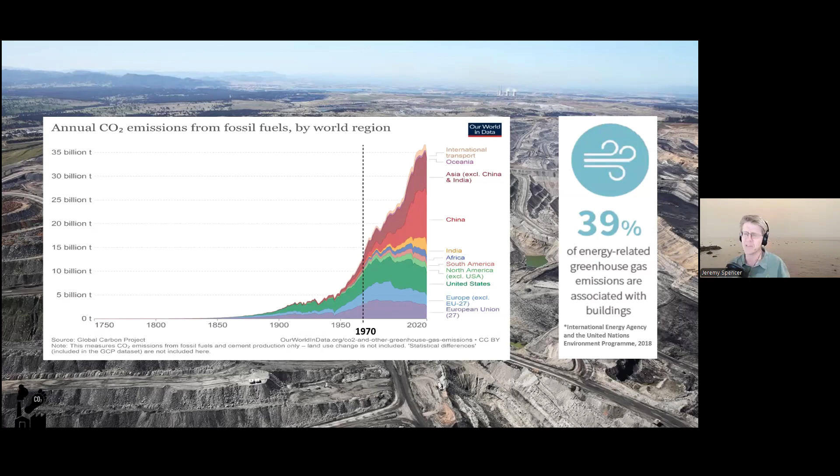The second thing it brings up for me is if you are in the building industry, you are in a job that disproportionately has an effect on trying to solve this problem. So you're in somewhat of a privileged position, and your choices matter, the way you run your business matters, and the product that you supply matters.

Let's bring it back to homes because that's what the Sustainable Builders Alliance is focused on. That's probably where our special knowledge lies. And let's look at the impact of our homes on this carbon number. So there are two main carbon impacts of our homes. One is operational energy use, and the other one is the embodied carbon in our homes from the embodied energy. That's the energy that it took to create the materials that our houses were made from, and the carbon dioxide that got released in using that energy.

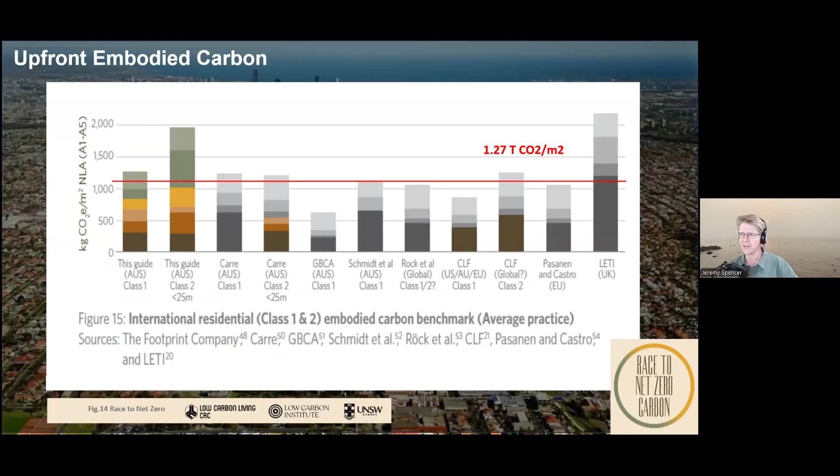On top of that, the demand in Australia is for 200,000 new residences per year. We're a bit below that at the moment, but that's what we're trying to build to keep up with demand. That means every 5 or 6 years or so, we're adding another million homes onto the grid. And we simply can't allow the next million homes that we put on to have the same impact as the last million homes, not just from the carbon point of view, but also if we are actually trying to green Australia, we're trying to put everything onto a grid and green that grid. For that not to cost the earth, we need to limit the demand of the new homes that we're putting into the system.

Which is why we, the founding members of Sustainable Builders Alliance, got together to create what we're doing and to try and give you that information. And it is simply this: we want to be able to give you the confidence to build net zero sustainable homes. What does that mean? That means we want you to be able to put a shingle up on your door to say, we sell net zero homes. And when someone comes to you and says, yep, I want one of those, you can say no problems and have the confidence to bring it into the market.

Towards that end, on this website, probably the heart of this website is something called the Roadmap to Net Zero Homes. And it's got 5 different steps, and all the information that we put on the website hangs on that scaffold of these 5 steps. And it's simply this, very simple steps. Step 1, good design. Design a home that's designed for its climate using passive solar design, so it needs minimal extra heating and cooling because the climate is doing the heavy lifting. Step 2, choose materials that are low themselves in embodied carbon, vis-a-vis other materials on the market, to try and have a lower impact home when you hand over those keys.

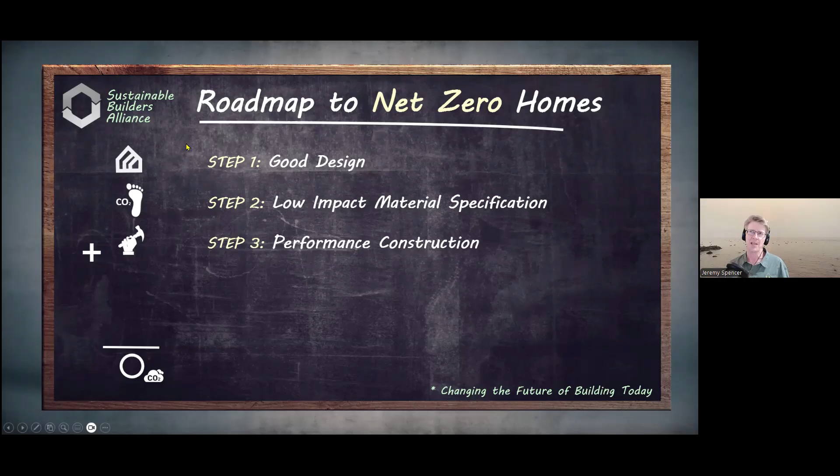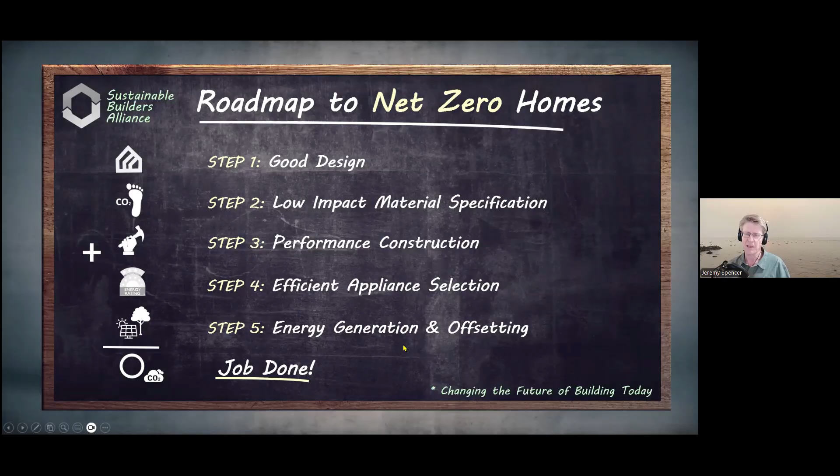Step 3, performance construction. Build the house so that it actually performs to its energy rating in that good design section, and it performs on the ground as it did on the paper in the design office. Step 4, then keep the demand low in the house by making sure that other major things, the appliances that you put in the home, are also energy efficient. And then the last step is to put on photovoltaics for either net zero, producing as much power over the year as you use, or potentially true zero, also accounting for the embodied carbon in the home and trying to offset for that. And job done if you can do all that. We'll talk a little bit more about offsetting maybe just at the end, because it's not quite as straightforward as I made it sound just there.

Okay, that's what Sustainable Builders Alliance is trying to do, but let's look at what's possible, and I'll show you a couple of homes that we've done, and also then the case study home that I want to show you today, and then we'll get into how it's all put together. This is sort of the Positive Footprints, I guess, story, my little backstory. This was back in 2012, not our first home, but I think our third home perhaps, maybe it's a few more than that, but it's the first one where our client came to us and said, our house is producing more power than it used. And he sent me this bill way back then. He's getting this bill every year or so. He's on a very good feed-in tariff, of course, which is coming to an end.

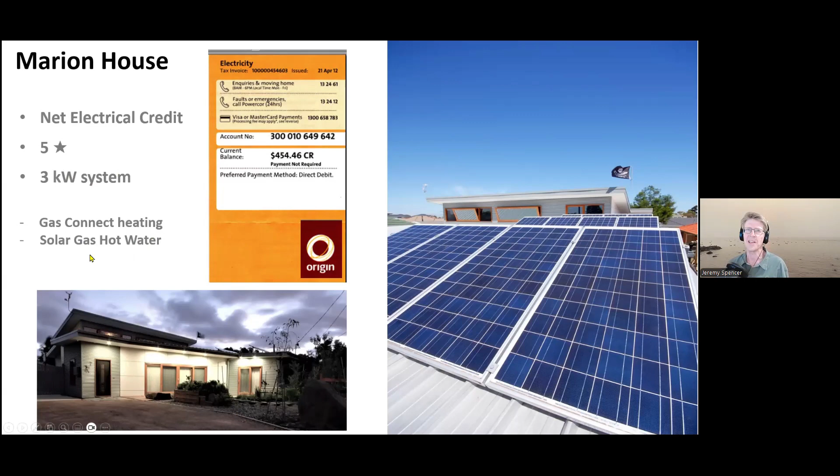But this gave me the idea that as long as you minimize the energy use in a home, it doesn't actually need all that much to run. This only had a 3 kilowatt system. It did have gas heating. We had gas hydronics, because this is back in the day when gas was green, and we had gas boosted solar. But this was the start of that inkling of an idea.

Then when the industry moved from 5 stars to 6 stars, there was a bit of an uproar at that stage about how difficult 6 stars would be. So we decided then to create the 9 star series. And this is one of those. This particular house we built for my parents, so I got a bit of the lived-in data.

This one had a 3.5 kilowatt system. It had reverse cycle air conditioning, but it still had gas boosted solar hot water and a gas oven. But I would say that this one was, well, let's say net zero, approximately. Though it's hard to work out because it did have some gas on there as well.

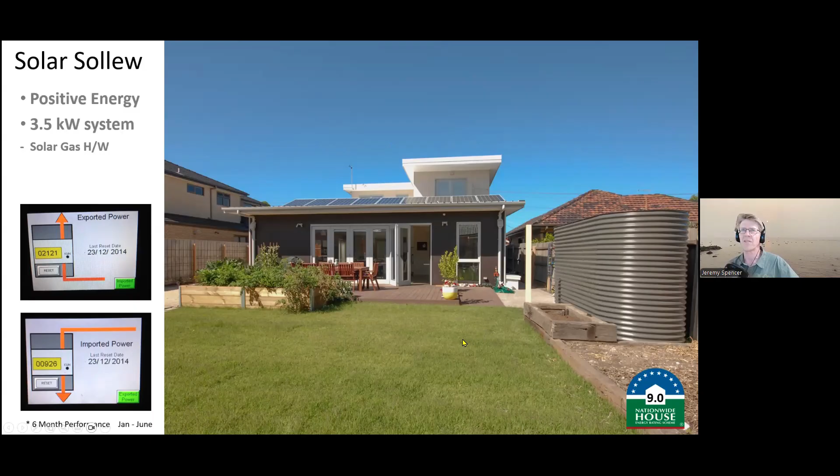Our first all-electric home, where you just got one fuel bill, so it's easier to work out what's going on. This one finished in 2017, and I believe Greg Lamb is on this call. Greg was our lead carpenter at the time on this job, so he pulled off a great one here. This house has been running for 2 years past 2017. After 2 years, the owners sent me the bills.

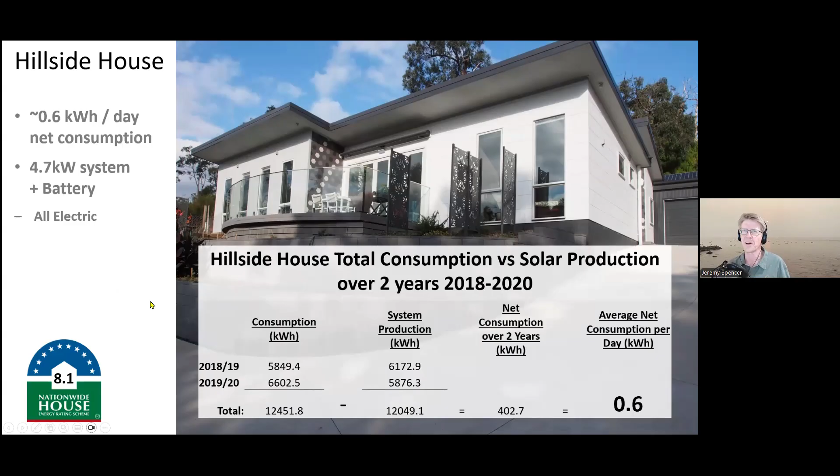They've got 3 adults who live in this home, and they work there during the day as well as sleep at night. And they were managing over a 24-month period to have a net average daily usage of 0.6 kilowatt hours. So just above net zero, but only a smidgen. When you consider the average, as I showed you before, is somewhere around 32 kilowatt hours when you have an all-electric home, this is very close to net zero. That was with a 4.7 kilowatt system and a battery. Of course, systems were a bit smaller than they are these days.

It can also be done for renovation, not just new homes. Whenever we do a major renovation these days, we aim for net zero as well. In the areas where we work, north of Melbourne, there tend to be a lot of older weatherboard homes where the weatherboards are getting to the end of their lifespan. As long as we get the opportunity to take off the cladding, re-insulate, maybe extend, we can usually get those homes to a net zero footing.

So the Carbon Zero series was Positive Footprint's response to all the hoo-ha that came up when the industry was considering going to 7-star and whole of home, and how difficult that was going to be, with the aim of becoming net zero ready. And we really wanted to show that you could go well beyond that already.

So the Carbon Zero series were homes that not only minimize their operational energy and then put on enough photovoltaics to provide the power that the house needs to run annually, but also calculate the embodied carbon in the home, minimize that, and then put on extra panels to provide more renewable power to the grid, so that over time that offsets fossil fuels needing to be burnt to provide that power and pays back the embodied carbon debt of the home. Now,

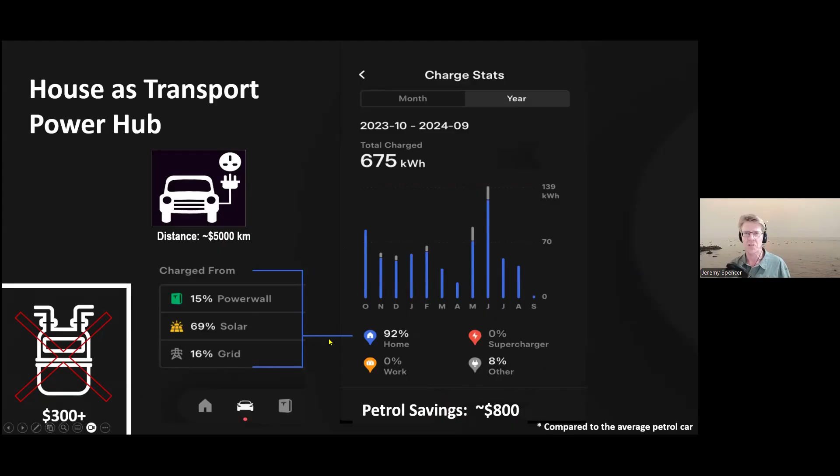So this house has a 13 kilowatt system on the roof, and it has a 13 kilowatt Powerwall battery, which is one of the reasons why it's able to have that very minimal demand. The other reason, of course, is because it's low demand to begin with. But that was a saving of $800 on equivalent petrol fees to drive that car. On top of that, because it's an all-electric home, we don't have a gas meter. There's another $300. If you start adding these numbers up, you get to a saving in excess of $3,000 year on year running this particular home.

Why is this important? Well, it's super important. I've started to think of sustainability as more than just the house itself and what we're offering the owners, but how it fits into the bigger picture. And the bigger picture, as I mentioned when we were looking at all those houses in Melbourne, is that we're trying to put all of industry onto the grid. We're trying to put business onto the grid. We're trying to put transport. We're trying to put all of our buildings and our homes onto the grid, with the idea that as the grid greens, most things on the grid green in tandem, as a way of reducing the environmental and carbon footprint of Australia more broadly, and getting to that net zero level. So that's the logic behind it. But if we don't want it to cost an arm and a leg, it's very important that our homes, if we want to be sustainable, minimize that extra demand as much as possible.

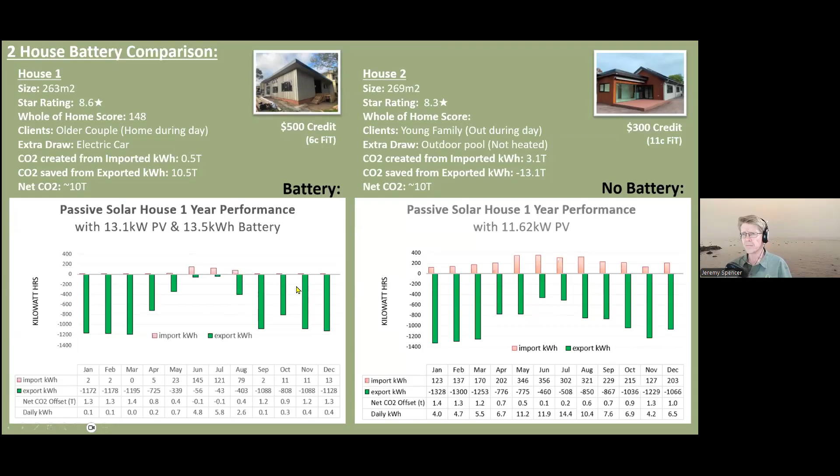But really, when you look from a society point of view, you have so much less demand on the grid if you can use most of your power at home. So this house is a very low demand on the grid, but it's also a very resilient home. Resilience is this buzzword that's been passing around for the last couple of years in the sustainability movement.

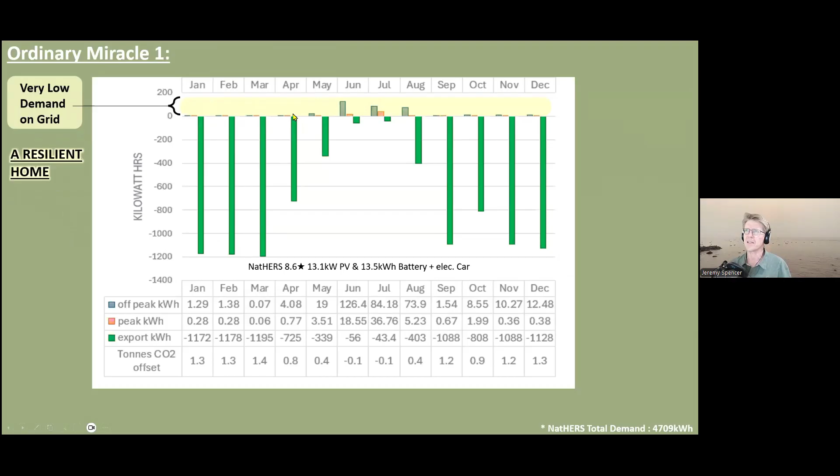What happens in the future when we have more floods, more fires, more problems, and there's potentially blackouts? We're after resilience. And if you look at this house, effectively, this house could just go offline and just run on its battery for months on end. That's a huge amount of resilience from a net zero home.

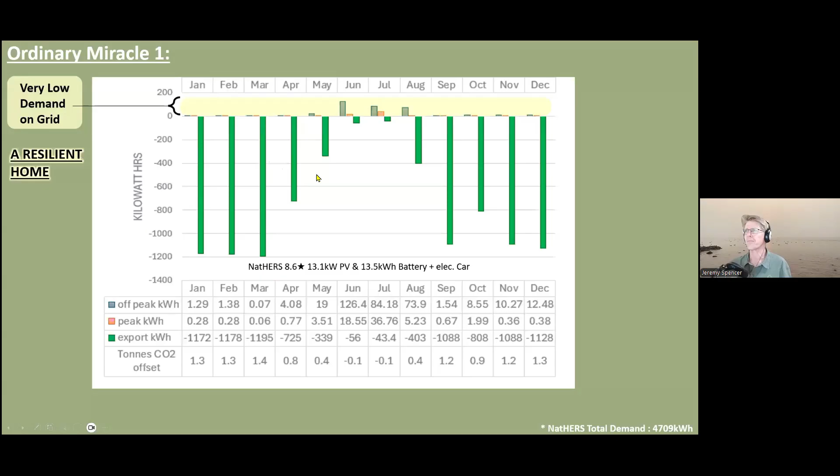The other thing to note about this graph is the amount of power that it produces. So there's enough power here. Again, when we're talking about some sort of emergency, there's enough power for people to come and charge their cars here if they needed to, or it could run, as it says there, enough power for 2 equivalent homes. So I'm starting to think of net zero homes as energy hubs.

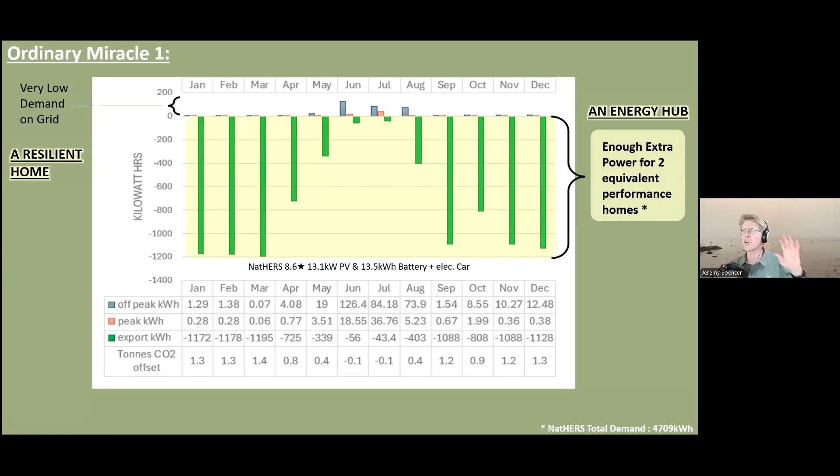Now, there is a little bit of pushback at the moment. Those builders out there who've installed solar panels recently may have found that it's a little bit more expensive at the moment because you need to have one of the new inverters that has a curtailment function. What the industry is worried about now is too much solar potentially being put into the system during the day, so that if there's too much solar, they've got a capacity just to turn that off to maintain the right voltage within the system.

So 2 things I'll say to that. One, producing the power is not something, in my opinion, that we should be stopping. What we should be doing is trying to harness the idea of batteries, and in the very near future, electric cars, which are simply batteries on wheels. In fact, a standard electric car has a battery about 2 to 3 times the size of the Tesla Powerwall that went in here. And of course, typically they're not doing anything at night.

What we were waiting for is something called V2G integration, vehicle to grid integration. But I'm glad to announce that went in a month or so ago into Australian Standard 4777.2, not one that we really need in the building industry, but one that the industry needs to start creating cars that not only can take power from the grid, but can also supply back to the grid and potentially supply back to homes as well.

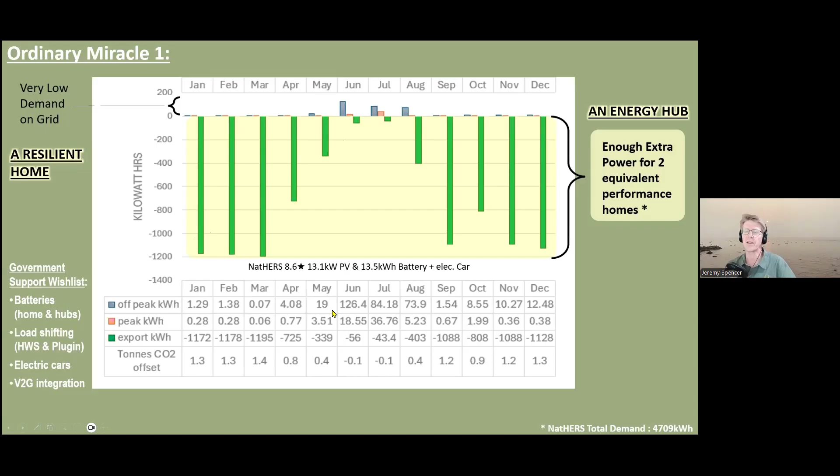If you're not already doing it, find a hot water service, an electric heat pump hot water hopefully, that has a timer on it at the very least, so it can be set to charge during the day. Make use of all this renewable power that gets put into the grid as a way of time shifting that power usage. All right, what else did I learn?

Well, this house exports to the grid 9,224 kilowatt hours, times 6 cents feed-in tariff. That's how you get the 553 in credit instead of the average electric bill for Victoria, 2,228. And when you work it out, it exports 20 times more power than it imports. And just looking at this sort of blew me away.

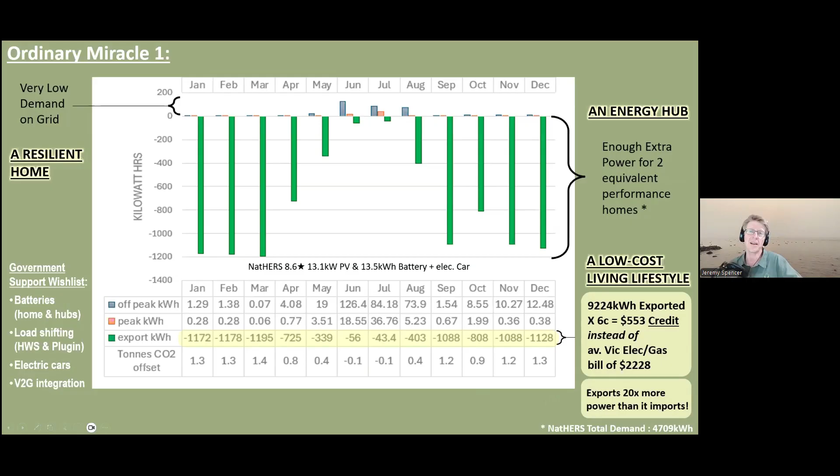So I also see net zero homes as now low cost living lifestyles. Not only does it save that much, but you can plug things into it like cars and you can save even more. And of course, no gas meter. And lastly, the house is offsetting 10 tons of carbon dioxide instead of creating that 5 tons of carbon dioxide. So it's a carbon negative footprint.

So when someone asks me now, what is a net zero home? This is what I'm answering. It's a resilient home. It's an energy hub. It's a low cost living lifestyle, and it's a carbon negative footprint. Okay, that's the operational performance of this particular home, and where we could potentially move to with just a little bit of incentive.

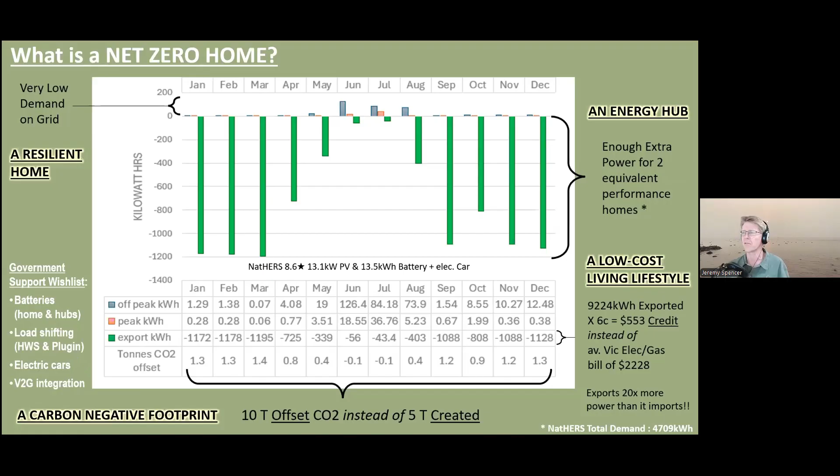By the way, if the government wants to put some incentive around getting more electric cars out there, once we get this V2G happening, just make charging during the day free. Imagine what an incentive that would be. People would be charging their cars during the day, come home at night time, and part of the deal is part of the battery could be used by the network providers to export to the grid or help balance the grid. Just a couple of ideas I had looking at this particular graph.

All right, let's look at embodied carbon, just to finish the performance of this home. So I ran this house through the True Zero Carbon spreadsheet, which is the spreadsheet I developed in conjunction with Melbourne University, who created the EPIC database. It works off the EPIC database. We developed this for the True Zero Carbon Challenge. This home has an upfront carbon component of 173.6 tonnes of carbon dioxide.

So still a lot, and hopefully I'll get some time to go through that, seeing how my voice holds up. But a fair bit less than the average home, 250 to 300 tonnes, somewhere in there. But if you look at that over here, just on a simple payback, 173.6 tonnes of embodied carbon, at the moment it's offsetting 10 tonnes of carbon dioxide per year, 17.4 years, if it was a simple payback and everything remained the same.

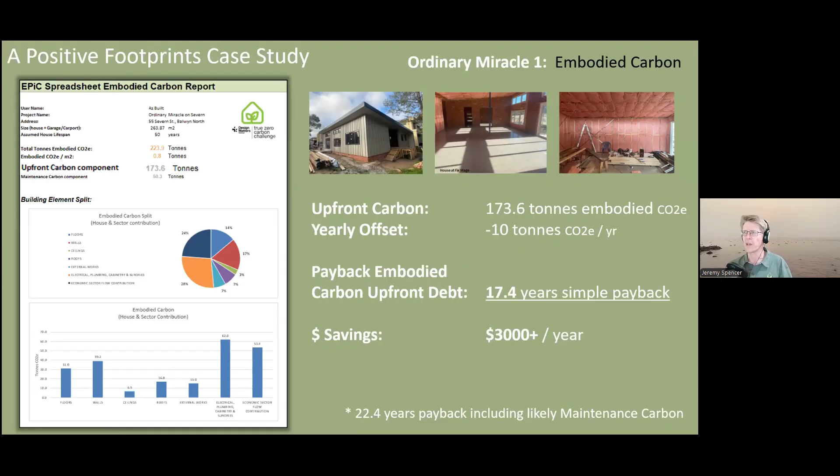Of course, the grid may green over time, so I might discuss some of the implications of this as a strategy a bit further on. This gives you a sense of how the house is performing, and on a simple payback, yes, this house is, I would say, a true zero home. This is just some of the True Zero Carbon challenges.

So the Design Matters National, we've now had, I think, 30 teams go through the challenge. Each one of them has been able to meet this same challenge of creating a true zero home that pays itself off by 2050. That's the actual challenge. But this just goes to show that if you put the right team and the right education together, it's not particularly hard to create these homes.

And it's just like riding a bicycle. Once you know what sort of appliances to choose from, what sort of scores you're going for, and you've got the right team around you that can provide that, it's easy to rinse and repeat, rinse and repeat.

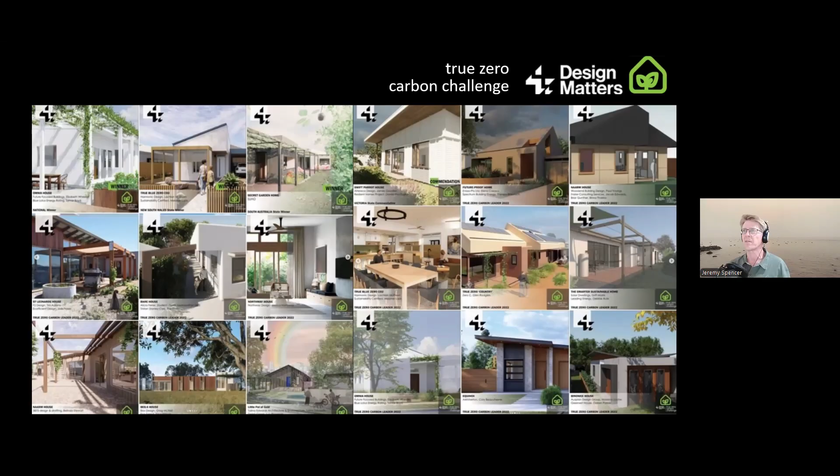And there's 3 different steps that you need to do to minimize this step. The first one is do a good design. And by good design, I mean a design that's designed for climate. In Victoria, we have to get at least 7 stars. The more the merrier, the more you can put on, the lower will be the amount of energy that the home uses. However, having said that, in the True Zero Carbon Challenge, we did have homes that were only 7 stars that then, through careful appliance selection, were still able to meet that True Zero goal. So it doesn't mean you have to get to 10 stars to achieve these outcomes if you do the rest right.

So how do you achieve a good design? Well, you simply use passive solar design to design for climate. And it's as simple as, if you're in a cold climate, try and invite the sun in. If you're in a warm climate, keep it out. In that case, try and get breezes to blow through your home, prevailing summertime cooling breezes, hopefully. Shade will be your friend. And if you're in a climate where you have a high daily temperature swing, linked to the mass of the earth, and that will help stabilize temperatures inside. Very simple rules.

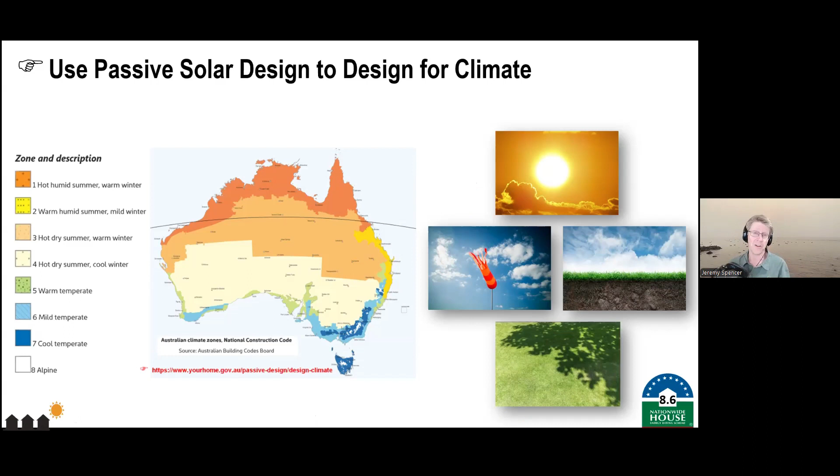I'll show you what we did on this home. Well, actually, before I show you what I did on this home, let me just explain how this idea of passive solar design links to the stars. So the stars are simply a measure of how much energy the house takes to heat and cool. And that in turn is a proxy for how well the house is designed for its climate, or how well you've used passive solar design. Our particular home is 8.6 stars. That's why the 8.6 there, the case study home that we're going to look at in just a second.

And that's why it's important to get a good team around you. So even if you're not involved in the design yourself, you're working with designers and architects who know this stuff, and then they're potentially passing it through to you if you're the builder or you're the energy rater. It's a matter of getting the right team, if you don't have all those skills yourself, if you haven't got them all in-house. At Positive Footprints, we've worked to get them all in-house, but it's just a matter of putting a good team together, and you can achieve great results as well.

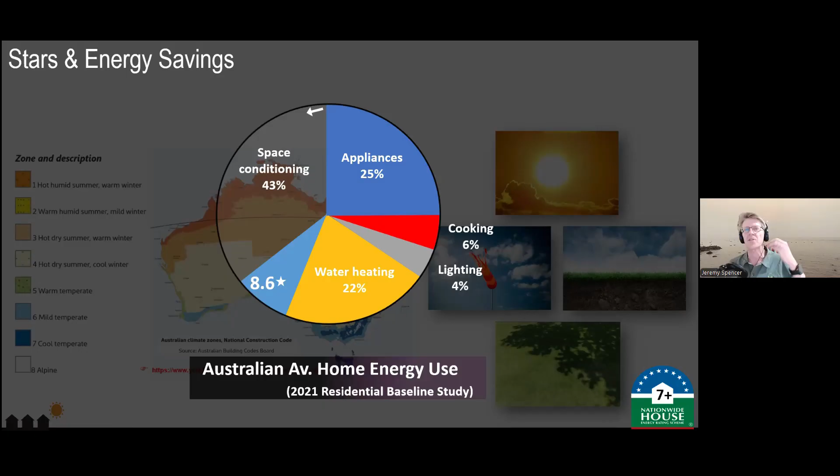It becomes even more important to get a good design in those climates. Now, our home, of course, was here, somewhere around here, 8.6. Now, these are just indicative, but it gives you a sense of the sort of savings that you're getting for those stars.

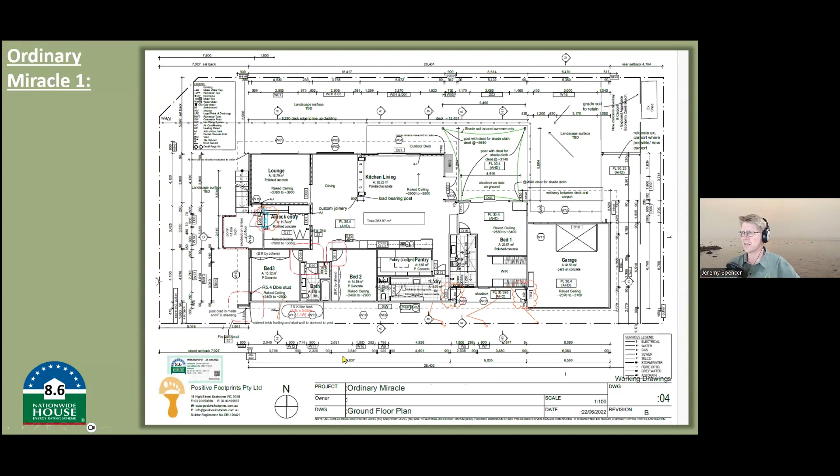All right, so how did we achieve an 8.6 star rating on this job? Well, here's the house, here's the floor plan. Simply, you'll notice that north is up the page. We started by just putting the living area on the north. This is really basic stuff. The sun rises in the east, sets in the west. It goes over the north part of the sky, doesn't go directly overhead, lower in winter, higher in summer.

You can see our eave line there. That eave line is designed to let the winter sun come underneath through windows, falling on that area, but to block it out in summer. The rest of the home, the other bedrooms and utility areas, are more like just sort of insulation on the cold side of the house, keeping that living area nice and warm throughout.

The master bedroom here does get a good deal of northern sunlight, and we put up a shade sail that goes up for the summer period to provide some nice shading over that area. Pretty simple stuff. Now, on a block, there was one tree, but I want to bust the myth, I guess, that this is a perfect site, or almost a perfect site, but you don't need a perfect site to get to 7 stars or even 8 stars.

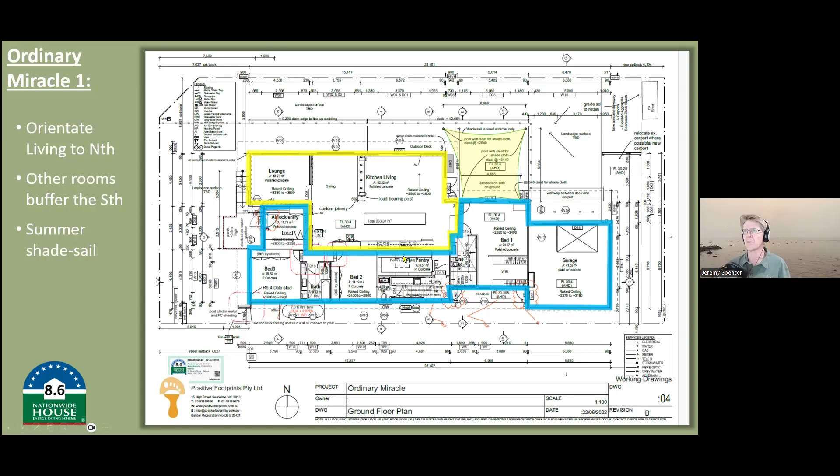If there's something in the way, as long as you're looking to try and place your main living areas in an area that can get some solar gain, then you'll do pretty well. And very few sites I've found over the years don't give any solar gain. Because remember, the sun is moving across the sky during the day, you usually get a good opportunity to place those living spaces.

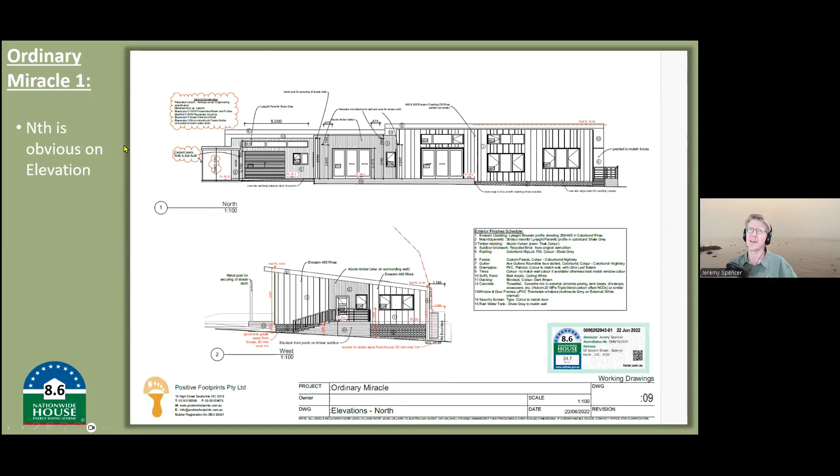Then, because we're in a heating climate, what's called a heating climate, trying to heat most of the year, we're trying to get sunlight into those living spaces. And so you can just see we've banged in some nice big windows there. And you can straight away see which way is obviously north, that elevation, and the other elevations. Windows and doors are primarily placed for access and for good ventilation pathways through the home.

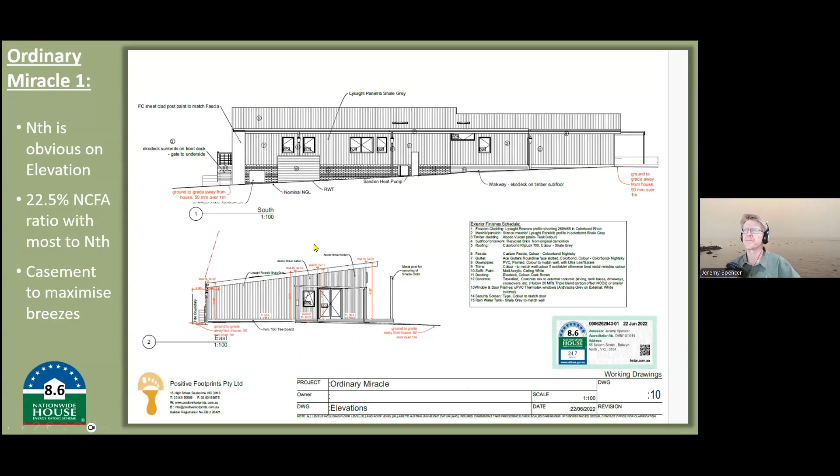And of course, the other thing that we always try and do, at least in the Carbon Zero series, is to choose good quality windows. On the SBA website, we recommend U values below 3 if you want to get to 7 stars and above reasonably easily. We typically go to the pointy end of window performance, and these are the windows that we've been putting in, the Thermatech windows. U value of 1.7, the lower the better. That's a good U value on the Australian market for a casement window. Solar heat gain coefficient, we're trying to get as high as possible. That's actually not a bad solar heat gain coefficient for a double glazed chunky window like this.

By the way, on the website itself, if you go into the Windows section under Step 1, Good Design, you can find all about how to choose windows, U values, solar heat gains, how to use the Windows Energy Rating Scheme database to find the best windows. So check that out. You'll find Thermatech there at the pointy end. PVC, very durable material, very robust, and of course, they recycle it all the time in Europe, and recycling is already starting up in Australia. Once we get more homes that the PVC windows are coming out of, no doubt that will also be recycled. PVC is a very recyclable material.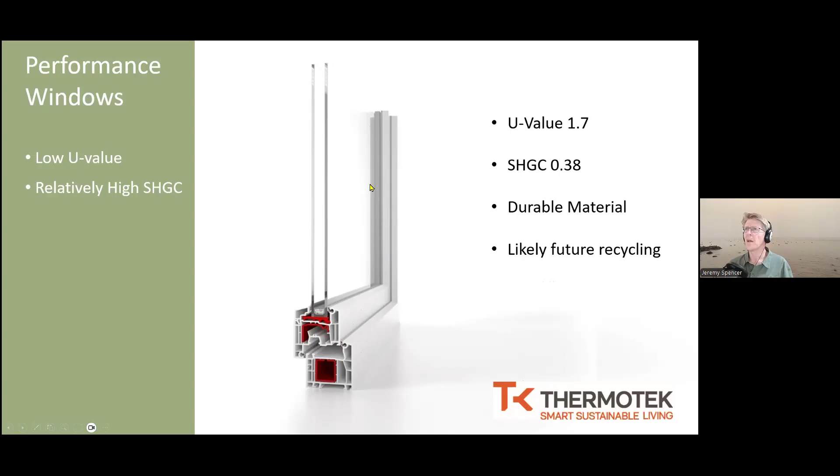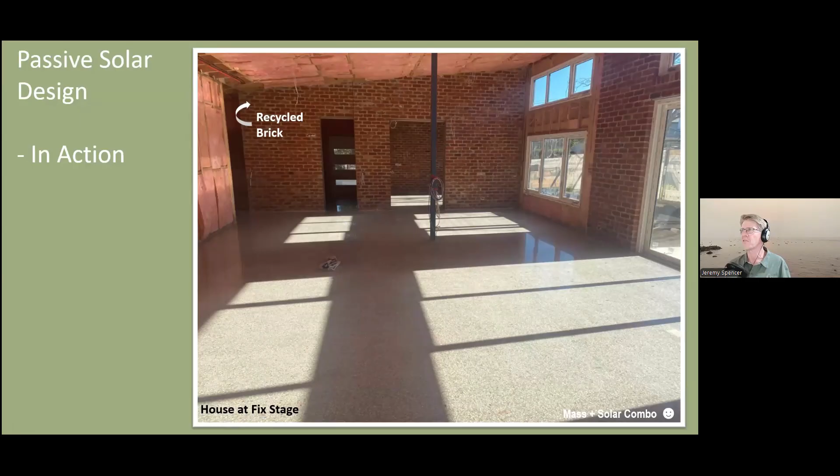All right, and what you're looking at here is the house in action. I guess this is just passive solar design, but it's so simple, people. It's just trying to get that sunlight. If you're trying to heat your home for most of the year, try and get that sunlight in. We also put in a little bit of mass, and there in Step 1 Design, you can find out all about how to use mass and good rules of thumb. All right, so knowledge base.

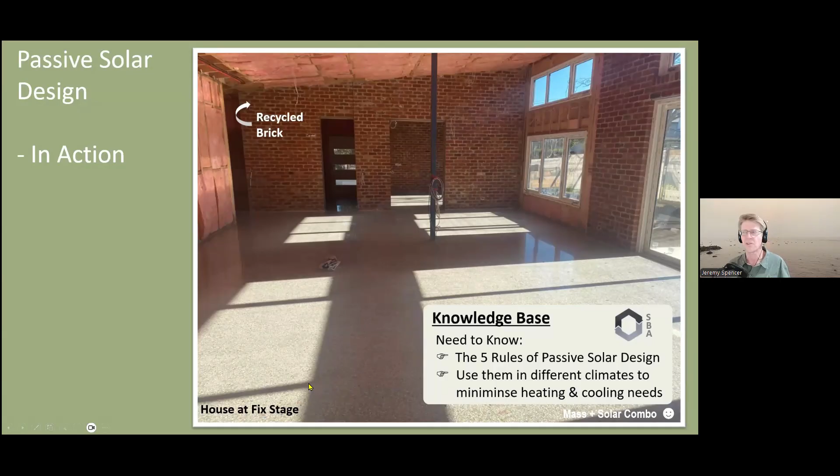This is what you need to know, or your designer needs to know, or someone in your team who's doing the design needs to understand. To get a good performance and a high performing home, you need these things. You need to know the 5 rules of passive solar design and how to use them in different climates that you build or construct or design in to minimize heating and cooling needs.

And where do you find the answers? Where do you find that information? You can go, as I said, to Step 1, Good Design, and you can see the 5 rules of passive solar design are all there. You can click on them. It'll give you a big rundown of those things. The other thing I'll point out is the SBA 7-star cheat sheet. You can download that as well.

I'm not sure if Ham said in the intro, but as well as being a builder, I'm a long time thermal performance assessor since 2004. Basically, all the tips that I know about thermal performance of homes are put into this cheat sheet, along with other tips from other energy assessors. So thank you everyone who's contributed to this.

But not a bad idea when you're doing a design to read through this and see if there's any red flags coming up in the design. If there are any red flags, get your design off to an energy assessor just to check it before it goes too far and gets fixed down in engineering.

And of course, the other thing I want to point out is that under each step, there's a webinar section at the bottom of the menu there, and it will have relevant webinars for the information. It's always best and most current to read the information, but at the moment, if you go to the webinar section, there are these net zero home webinars that I did a couple of years ago.

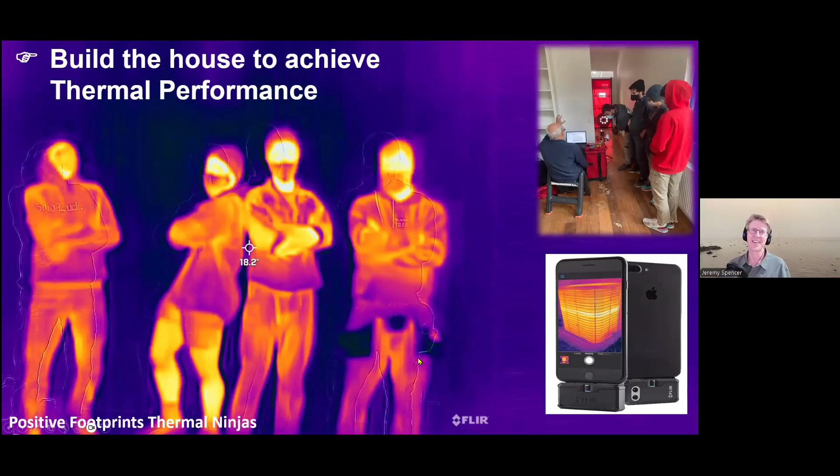And this is something that the industry and SBA in particular have been trying to change, and things are starting to move, I believe, in the right direction. But you want to get a team, or you want to teach your team, or if you're a designer, you want to choose a builder who knows how to build to achieve the thermal performance. And here we have the Positive Footprints Thermal Ninjas, who are simply our carpenters who've been through the process many times. Here's some examples from that case home.

And insulation is really, I think, just about number one, trying to get the insulation flush and well installed throughout. And as we move to offering net zero homes, it's very important for the builder, from a risk management point of view, that you start getting these photos so that you can back yourself if there's any issues. You can say, well, I installed everything as I was supposed to.

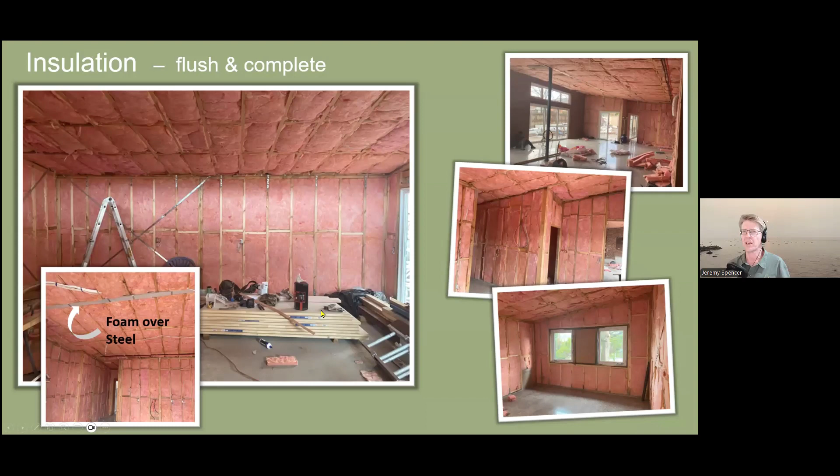Note here the foam over the steel to try and stop a little bit of thermal bridging there. A little bit of AbleFlex kept on site can really help with little bits of thermal bridging you find, or at least help, if not stop completely. This particular home, we had an interesting mixture of a slab on ground, and we actually had a waffle slab that moved into a Bondek slab when the ground fell away a bit to try and keep that single level.

Now, from the design point of view, I would always suggest that builders or designers look at the designs you've come up with, especially once you get the engineering back, and think of it from an energy flow point of view. Are there any spots where the insulation is broken? Are there any spots where you're going to get some thermal bridging of some conductive material passing through the insulation layer?

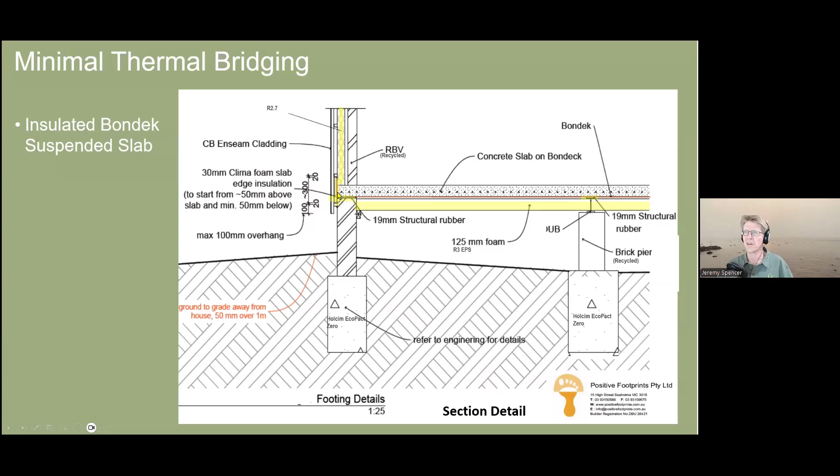And here we were always going to have insulation under the slab. There was 125 mil foam, but at the piers there was going to be a bridge, and on all the external brickwork as well, there was going to be a thermal bridge. So we put some 19mm structural rubber just to limit the heat flow there, not to stop it completely, but definitely to slow it down a lot. A little bit of edge insulation at that slab edge, and then wall insulation.

And this is what it looked like on site. You can see our subfloor recycled brickwork. Complete sheets of polystyrene, which, at the end of the build, if you take down that brick wall, you can just slide out because they all just slide into channels, and the structural rubber there.

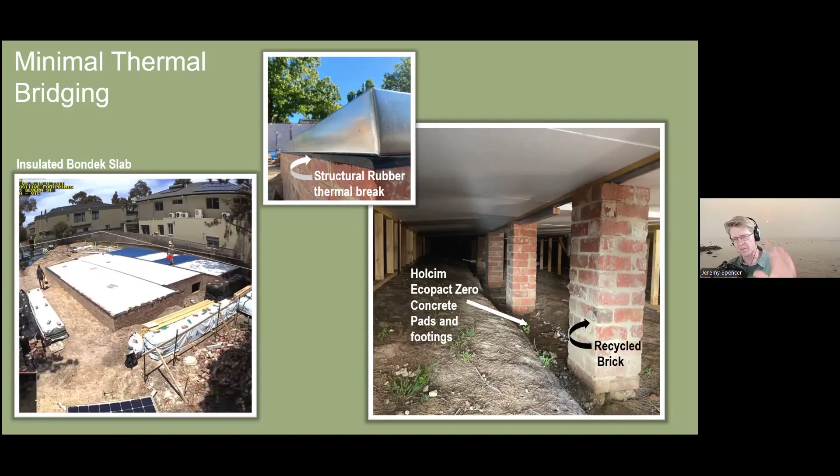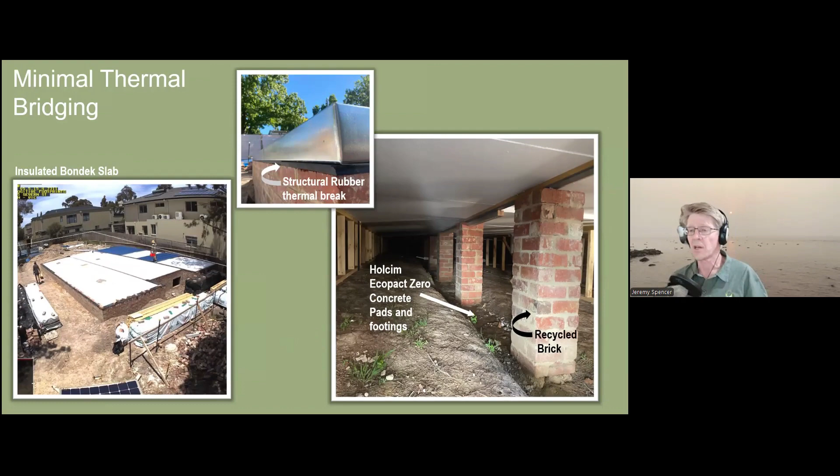Now, I do want to stress this particular build. This is not a common way to do floors. And so there's a cost to this, but really what I'm presenting today shouldn't cost, apart from maybe if you put the battery in at the moment, and maybe the photovoltaics. Everything else is pretty standard for the house. In fact, the other Carbon Zero series home is simply on waffle pod standard construction.

This is another thing to think about that we had to consider on this job too. We had a paving slab, which was going to have a deck over the top of that, abutting onto the house slab. And you want to make sure this is done in separate pours, or that you have insulation in between. Otherwise, what happens at night, the paving slab outside gets very cold in Victoria, and if it's directly linked to the house slab, it will just suck heat out.

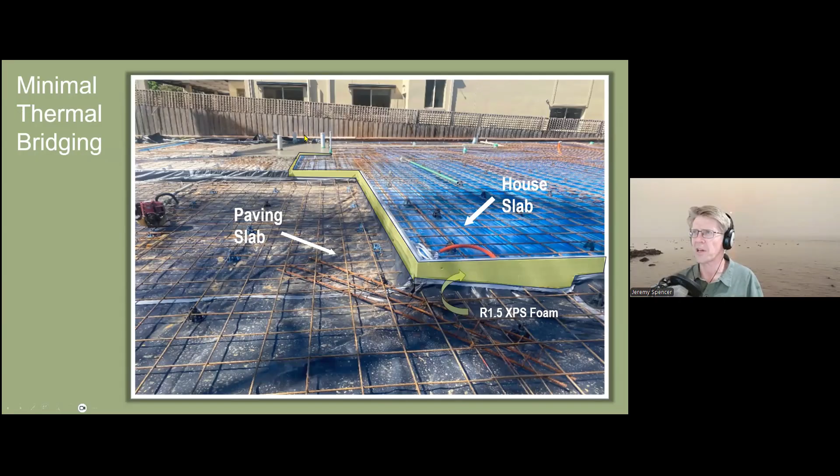Now, these things aren't taken into account in NatHERS. They are in PHPP from what I understand, but it only takes a bit of an eye to think about these things when you're looking at the design, and a chat to a good engineer who also is on your team trying to get a good thermal outcome, to come up with a solution and to note the things that need to be done. So we put some insulation, R1.5 XPS, just through that section.

What else do we do for thermal performance? Well, our home is just standard construction. We do the wall wrap on the outside. We're still using foil-backed blanket on the ceiling. So like I said, standard construction. So for our tightness barrier, we're working on the plasterboard and trying to make sure that the plasterboard is reasonably tight. Square set cornice is a great tight long-term seal. Easy reveals to windows. Similarly, it's a tight seal rather than architraves, which paint can crack over time.

What else do we do? We're downlight free. There's no downlights in this home. They're all pendants hanging down. Ductwork free because we're using reverse cycle air conditioners. Backdraft dampers to exhaust fans. All these sort of standard things, but we're just putting it all together. I think we had 2 cavity sliders sealed so that we don't have a literal hole in our plasterboard to create an air pathway, and all plumbing penetrations caulked nice and tight.

We do blower door tests, and I would suggest, if you're not yet doing blower door tests, you don't necessarily need to do them all the time, but it's good as a builder to know how tight you're building. For NatHERS, we're only trying to get under 10 air changes. I'm shooting towards 5 at the moment.

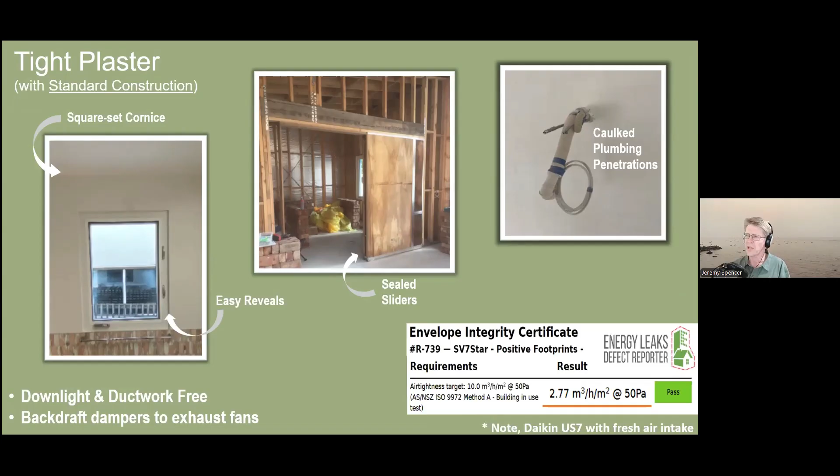Back then when I did this home, we were using Daikin US7s throughout. Unfortunately, they're not available on the market anymore. But those Daikin US7s actually had a fresh air intake as well, and they were excellent. They also had a dehumidifier that worked both in heating and cooling mode. Great units, but in their wisdom, Daikin decided they were too complicated for the Australian market and took them away.

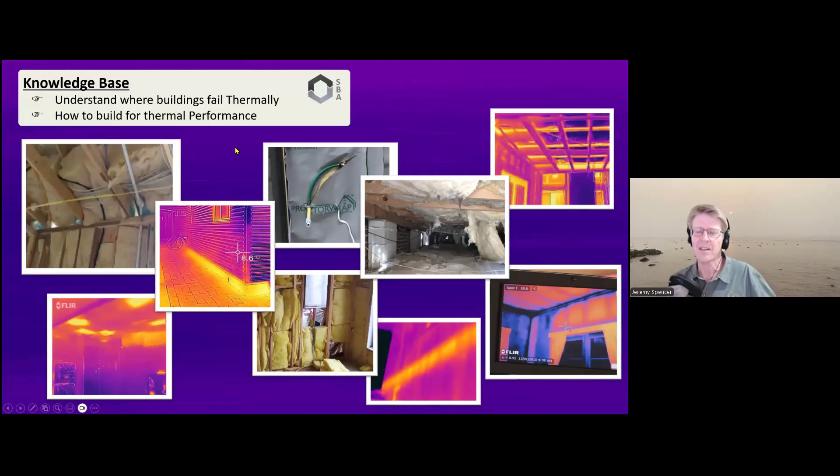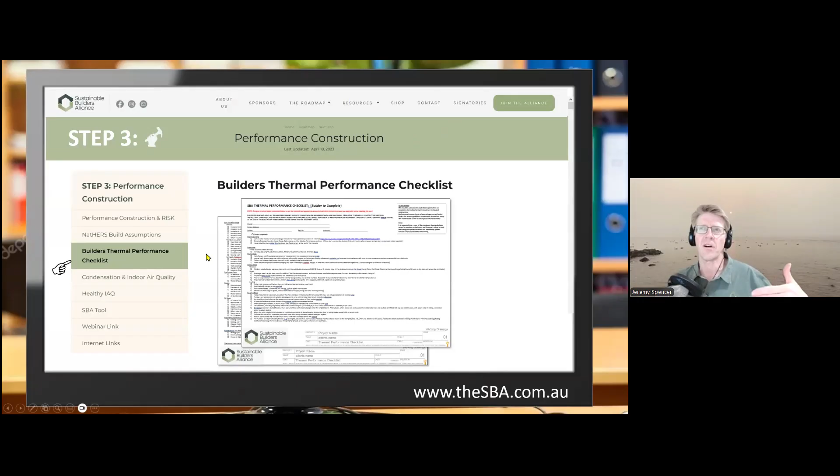All right. So if you want to get your home performing on the ground as per its energy rating, you need to get a builder or a building team, or you need to be a building team, that understands where buildings fail thermally and then how to build for thermal performance in the building technique that you're using. Under step 3 of the roadmap, we have a full section on standard construction, where that fails, and we have this builder's thermal performance checklist. Once again, I've taken a bit of time putting this together over the years. This is something that you can download and you can change as you like.

I find this particularly useful for builders who want to give a quality assurance checklist to their trade or their site manager on site to tick off and make sure things get done. The idea is, especially with standard construction, it's important to make sure that little bits and pieces are done before the next stage. If you haven't caulked the plumbing penetrations and the wire penetrations before the kitchen cabinetry goes on, you're not going to be able to seal it later because there's too many gaps and cracks around the cabinets. And once you put a blower door test on or the wind's blowing, you'll feel breezes coming out where you don't want them to. Just little things like that. This performance checklist is full of that.

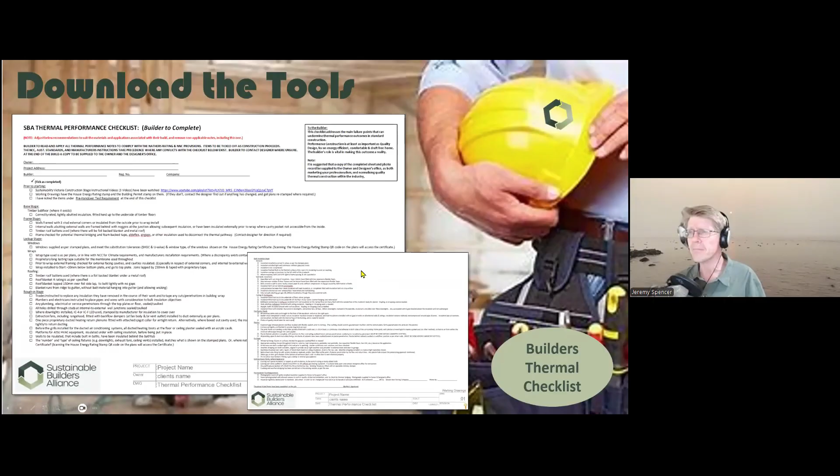I know a lot of designers are also starting to use this and put it in their design documentation. So yes, consider having a look at this if you haven't already.

The website goes through each one of the areas where building fails and gives a rundown of what the control measures are for that. Once again, if you go down the bottom of that step number 3 there, you'll find a webinar link that can take you out to Net Zero Homes, module 2, which is all about how to achieve on-site performance. These were done a little while ago though, so the website is probably the better information to go from.

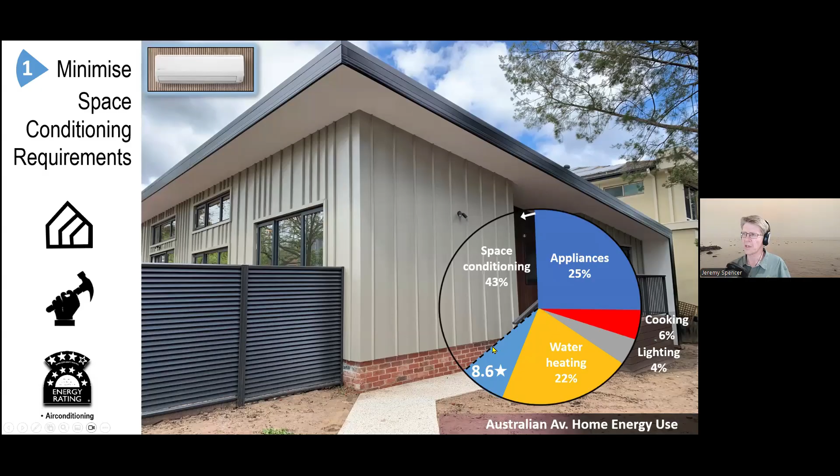All right, so assuming you build the house to quality, as our thermal ninjas do, you can expect the sort of savings that you'd expect from the energy rating to actually be on site. And you can see how much of a saving that we've done there. But there's one more step on this particular wedge, and that comes down to the heating and cooling plant that you put in. This would be how much heating and cooling energy is required for standard plant, but we can choose much more energy efficient plant to reduce this even further.

And the appliance of choice, as I mentioned, is reverse cycle air conditioning. Reverse cycle air conditioning is a type of heat pump, and heat pumps are a game changer for the sustainable all-electric home. Effectively, heat pumps use at least 2/3 less energy than standard, say, ducted heating. They can heat with about 1/3 the energy of ducted gas heating, say. They're extremely efficient at what they do.

And they can get that efficiency because they've got an inside head, they've got an outside motor, and they've got a refrigerant that just runs around between them. And all the refrigerant does, it comes outside, it goes through an expansion coil, I think. It goes through an expansion process anyway. And that makes it very cold when it's outside in heating mode. There's a fan that blows across some very cold pipes with the refrigerant in them. The heat from the air goes into the

pipe, into that refrigerant, and then it just runs around inside, goes through a compressor that squashes the refrigerant, makes it very hot, and goes through the head unit. A little fan blows across little pipes at the back with the hot refrigerant blowing through it and blows the heat out into the room. And so it's just like a sponge soaking heat out of the air in heating mode, and then coming inside and just sort of squeezing it out inside the house, a bit like a big sponge.

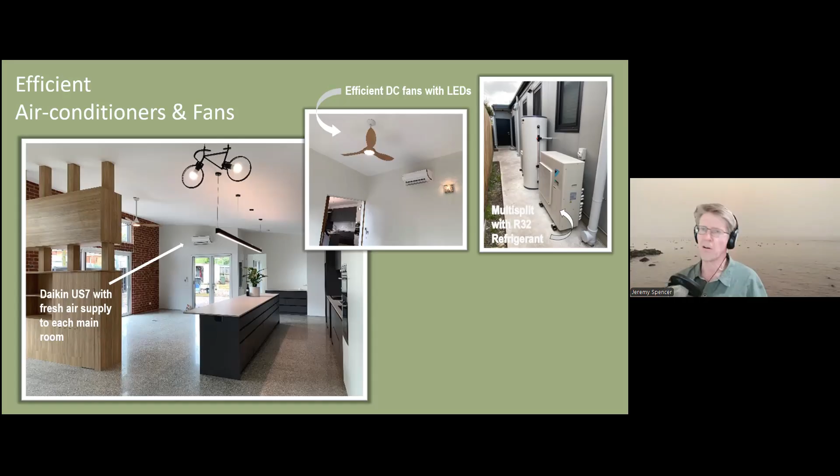And in cooling mode, it just works the other way around. And in doing this heating or cooling, all that the motor is doing is just running that system. So it can use a low amount of energy, but still transport a high amount of heating or cooling.

All right, so to actually implement a strategy where you're using efficient reverse cycle air conditioners, these are the things that you need to know, or that your team needs to understand to choose your system wisely. You need to know how to size up the required units. You need to know how to choose efficient units once they've been sized up for what kilowatt capacity. How do you choose efficient ones from inefficient ones for your climate zone?

Check the refrigerant. You'll notice here our multi-split has an R32 refrigerant. That's a reasonably low greenhouse gas potential, what do they call it? Global warming potential refrigerant, which is important because at the end of life or as a system goes through its lifespan, it can leak some of that refrigerant, and some of those refrigerants are very high in their own global warming potential. So you want to choose wisely your refrigerant.

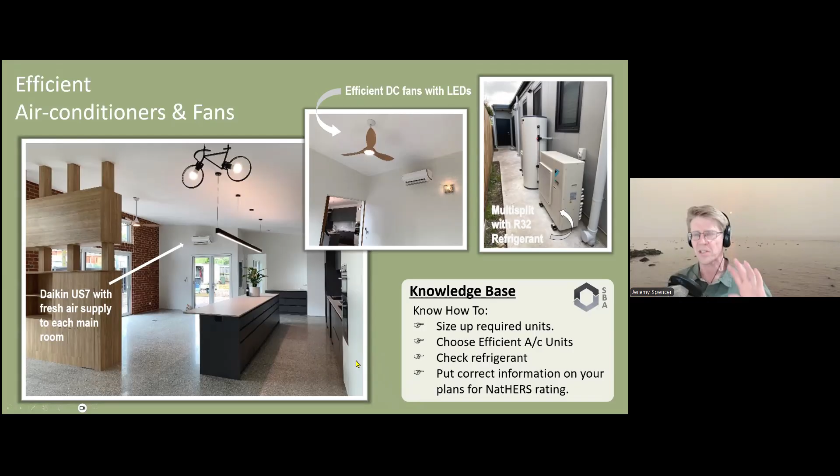And lastly, as we move into NatHERS whole of home, to actually do the process, the assessor needs the relevant data on their plan. So you need to know what information to put on your plans, just to assist that NatHERS process and to make it nice and quick for the energy rater. And where can you find that? You can find it all under step 4 that goes through all the fixed efficient appliances and gives the information you need. In this case, energy efficient heating and cooling.

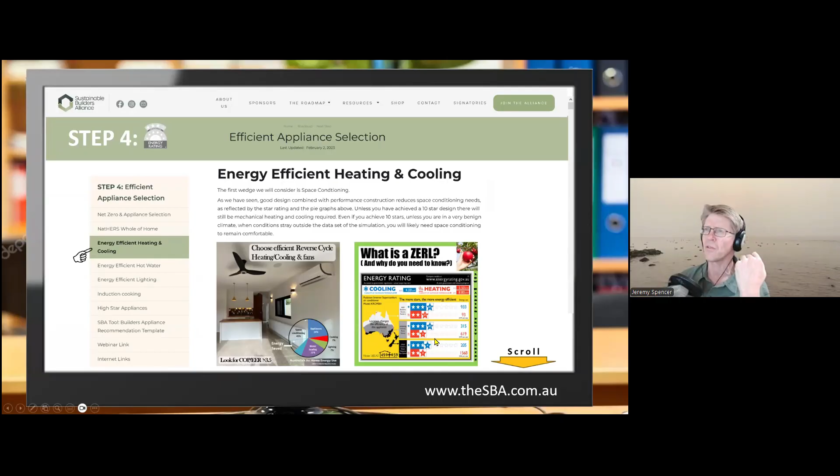If you click on that, you scroll down and you will get links to all of that good information. You'll also notice that there is a link here for air conditioner details to put on plans, and that will allow you to download templates if you want to use them. And the templates also have instructions of how to fill them in, where to get the information, what information to look for to make it nice and easy.

So assuming you use efficient reverse cycle air conditioning, as we did in this build, you can expect to provide the required heating and cooling with only a fraction of the energy to do it. Something like that. So you can really see through good design and a good appliance choice there, we've really made mincemeat of how much energy the average home would use for the process of heating and cooling.

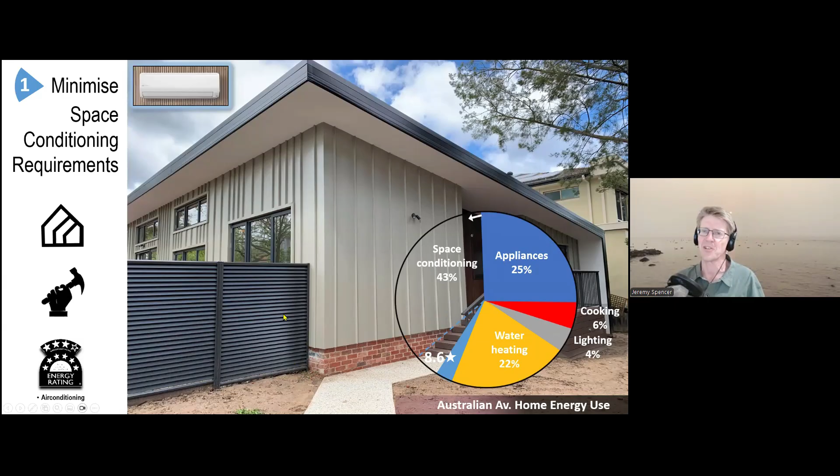All right, let's move on to the other wedges. The first wedge is the hardest. The other wedges are easy because they're just appliance substitution. So in the second wedge, water heating, 22%, approximately a quarter of our energy use goes to water heating. And there's two main ways to limit the demand.

One is to choose hot water appliances that themselves are water efficient, so there's not so much water to heat up. And the other one is to choose an efficient heat pump hot water system, or potentially solar hot water systems in the right climates are also very good at providing low energy hot water. In our case, this is what we provided. We use these Methven Rua shower heads.

They look pretty funky. They're a 4-star hot water shower head, and they give a pretty good spread of the shower by banging the droplets against each other. So you're using less hot water. And why the shower? Typically half of the hot water in a house will go through the shower head.

Now, the shower head is not part of the NatHERS scheme, but it does make a difference. So this is one way you can actually get your home performing even better than what the simulation says it might. And the other way is to use efficient heat pump hot water. In this case, we used a Sanden hot water heat pump. Importantly, with the Sandens, you can unscrew the lid and change the time on them to set them to heat during the daylight hours.

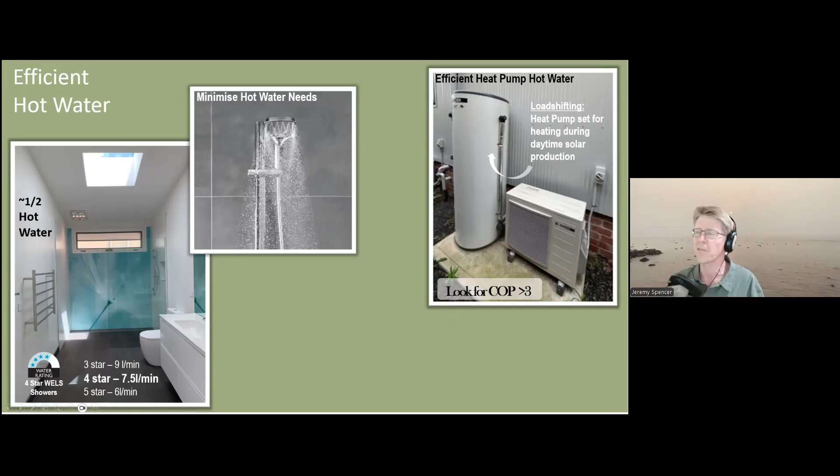And there are other systems out there that make it even easier for homeowners to set the time of heating on the hot water units, to make use of all that renewable power that's being put into the grid by solar systems and wind farms during the daylight hours.

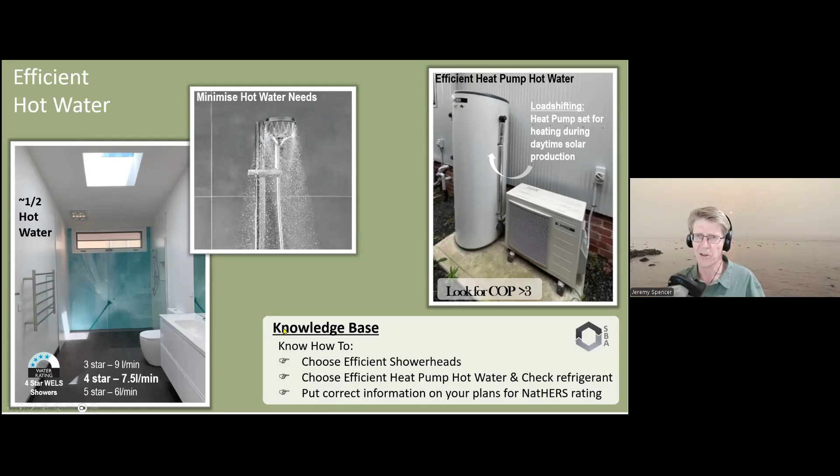So the knowledge base here, what do you need to know to make big savings on hot water energy usage? Well, you need to know how to choose efficient shower heads. You need to know how to choose efficient heat pump hot water for your climate, how again to check the refrigerant, what refrigerants are good ones to look out for, and again, the information that the thermal assessor will need on the plans to do a speedy rating without a lot of calls backwards and forwards seeking information.

Once again, step 4 is where it's all at. Scroll down and you'll see the information that you need to find out. It's all there. So assuming you do those two things, efficient shower head, as we did in this job, and a heat pump hot water system set to daylight timing, you should be able to make this much hot water.

Well, first of all, you'll need less hot water because of the efficient shower head, but also you can make it more efficiently because once again, this is a heat pump hot water, which means it's very efficient at shifting heat into the hot water tank. There's a better description of that again on the website and in the videos.

But this is the sort of gains that you can make simply from those two steps. Approximately 2/3 of your hot water energy use is taken away. And you see how we're starting to eat our way around this pie in a whole of home method.

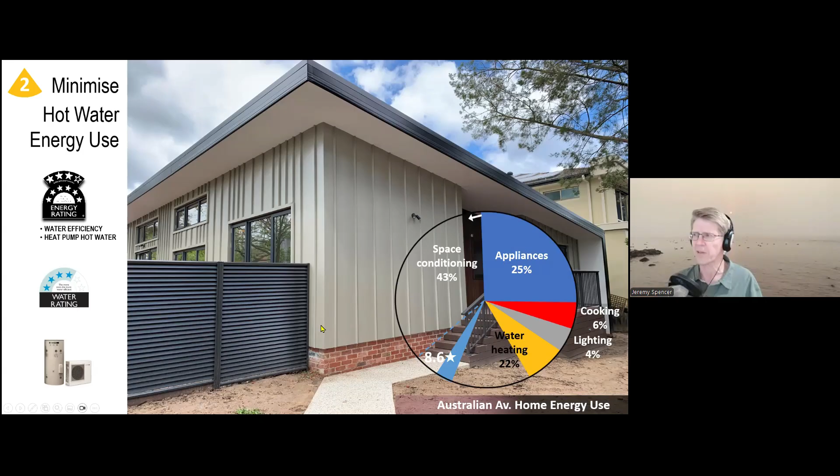Okay, lighting. Now, lighting is a very simple one. Simply use LEDs. Most new homes these days will all be LEDs anyway. The other thing to consider is to try and use pendants rather than banks of downlights. Why use pendants and wall lights? The reason is that a pendant spreads its light out much better than downlights, so you typically need fewer bulbs and you can cut down on your watts per square meter.

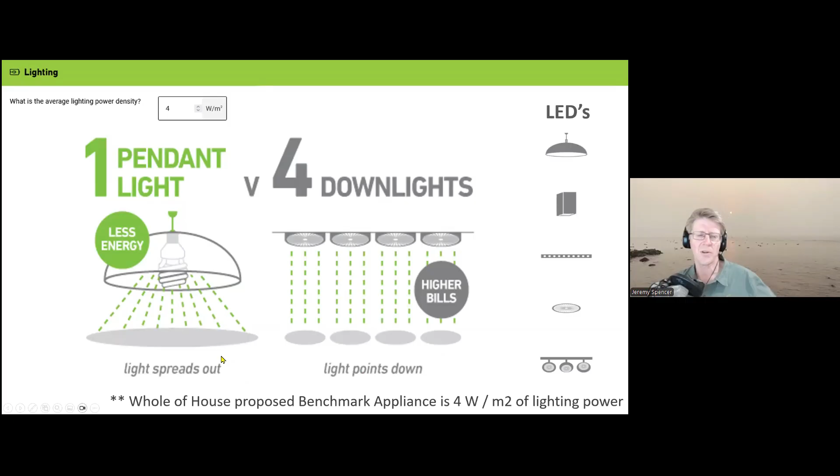I didn't go into how the software, NatHERS software works, but it does rank your home against benchmark appliances. And for lighting, the benchmark it's ranking against is 4 watts per square meter. So you're trying to get less than 4 watts per square meter to sort of get ahead and get a good score on NatHERS there.

The other important reason to try and minimize banks of downlights is if you're using the plaster as the tightness membrane in standard construction, you're wanting to limit the number of penetrations. Every time you put a penetration through that, you're sort of loosening the house. And you don't want to loosen the house too far because then it will go outside of the NatHERS assumptions for the tightness of the house, and it won't perform to the level that the software assumes.

If you do want to put in downlights though, make sure they're ICF or IC rated and they have a little sticker or a stamp on them saying that they can be covered completely with insulation. The other thing that I would do is make sure the springs are nice and tight and put just a little diaphragm on the back side of the light so it acts as a gasket and really seals it off to the roof plaster, so you don't get this heat loss under wind loads.

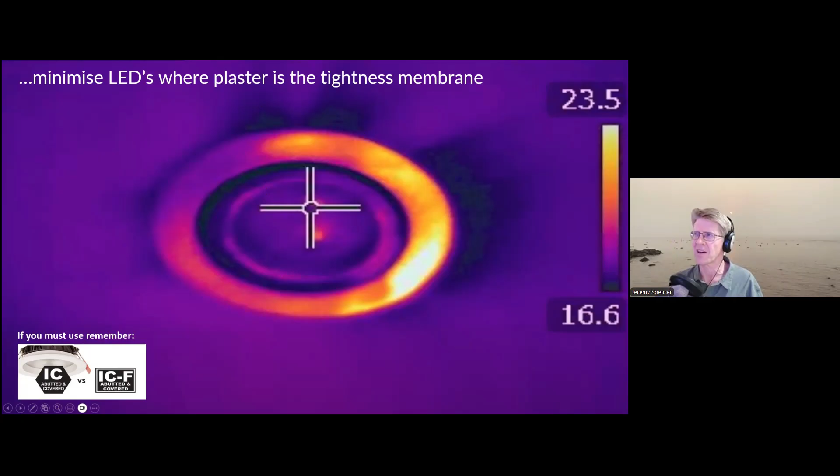All right, so what do we need to know there? Especially if you're thinking about how to minimize your lighting needs, you might need to have a think and learn about how to size up lighting using pendants and LEDs. And the other thing is how to work out how many watts per square meter your house is using to put on your plans for your NatHERS assessor to put into the software. Once again, you'll find that under energy efficient lighting, scroll down and there's links out to a lighting table and some rules of thumb when designing with LEDs and pendants.

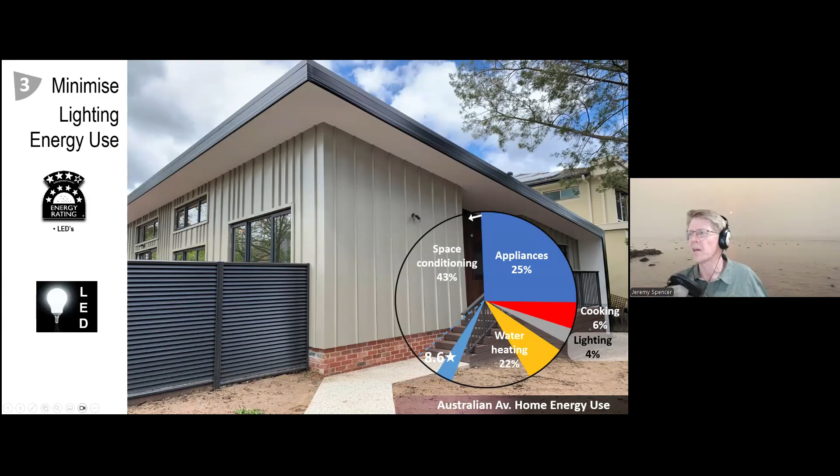And if you do those steps, as we did in this house, minimize lighting with pendants, you just get a little savings, only a little wedge there. So you only get a little saving, but again, you've eaten away at that. Let's move on to that cooking wedge. We're nearly through this circle.

Again, another easy one. There's only one appliance to consider here for cooking that's more efficient, and that is induction cooking. Gas cooking, you lose quite a lot of the heat of the gas as it flows up and around your saucepans and your pans. Induction cooking is about 50% more efficient at getting that heat into the food itself. So here you can see we just use an induction cooktop. They have many other benefits as well.

Gas, when it burns, actually creates water vapor. So in the home, you're trying to limit the amount of water vapor that's being made. So that's one thing. Incomplete gas burning also leaves nasty chemicals and puts them in the air. Not great according to the Asthma Foundation. So some good reasons to go induction cooking.

Very easy to clean. And perhaps the one that I like the most is that this is usually the last gas appliance in the house to swap over. And if you swap it over, you can say goodbye to the gas meter. You only have one meter, it's easy to see how much energy you're using, and you can say goodbye to that $1 a day connection fee of the gas meter.

The information you're going to need to know here, if you haven't done it before, there's different induction cooktops. Some of them require different amperage cables. They need to go in at rough-in stage, not later. Also, if you are going all electric, there's a very good chance that your electrician's going to tell you you need to go 3-phase. That actually has some good application later on for the amount of solar you can put in, the amount you can feed back into the grid.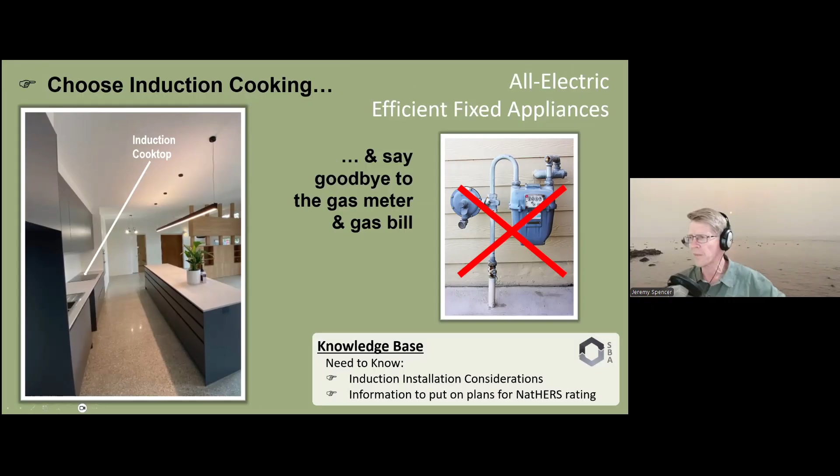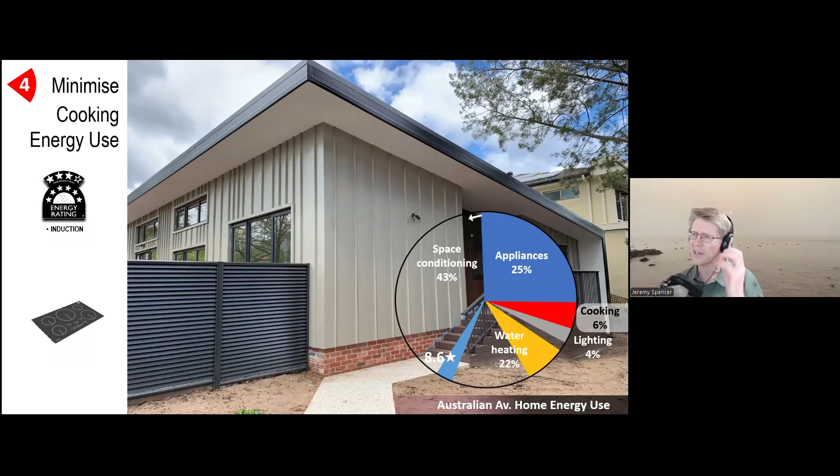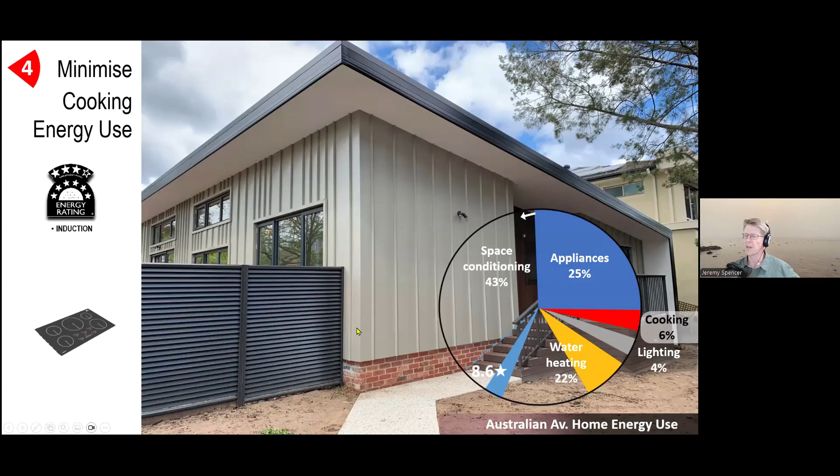And again, there's some information to put on the plans for the assessor, and you can find that on the website. I keep directing you to the website really just to show you that the information needed here is there, for when you need it. But if you go induction cooking, you can make a little bit of a dent into that wedge as well. Now, the last wedge is the appliance wedge.

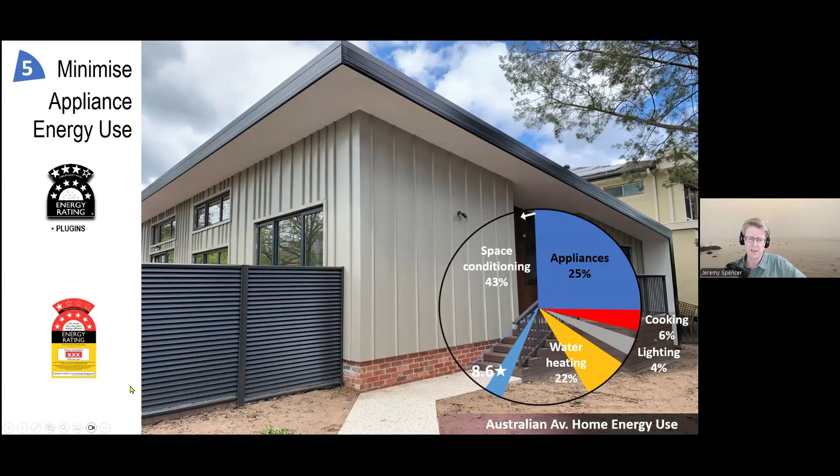And most builders, most designers probably don't get too involved necessarily in appliances. But in the Carbon Zero series, we do. The Carbon Zero series comes as like a project home package, if you like, and it comes already with the major appliances. And the major appliances come with an efficient television, an efficient fridge, the fridge has a freezer, an efficient dishwasher, and clothes washer. Oh, and a dryer. Comes with all those things already priced in.

Why do we do that? What you're looking at here is, again, a pie graph. I like my pie graphs. This is the pie graph of that appliance wedge, the plug-in appliances, and it shows that half of the plug-in appliance load are these sort of big white goods that you typically will put into a new home or a major renovation.

Now, what we found just from the 2 homes, well, we're building another one at the moment, but we've found that clients don't necessarily like the appliances that we've chosen. But that's okay, because once we've set a very efficient appliance and we've explained why that appliance is efficient, clients will typically go out and they'll choose their own thing, but it will be very close to the same efficiency.

A simple bit of information, this is one that I like to show them, is the difference between the best in class and the worst in class of your major appliance sizes, and a 10-year operating cost. I don't know whether this is still on the web. They used to have this at energyrating.gov.au. You could use the calculator and send clients there.

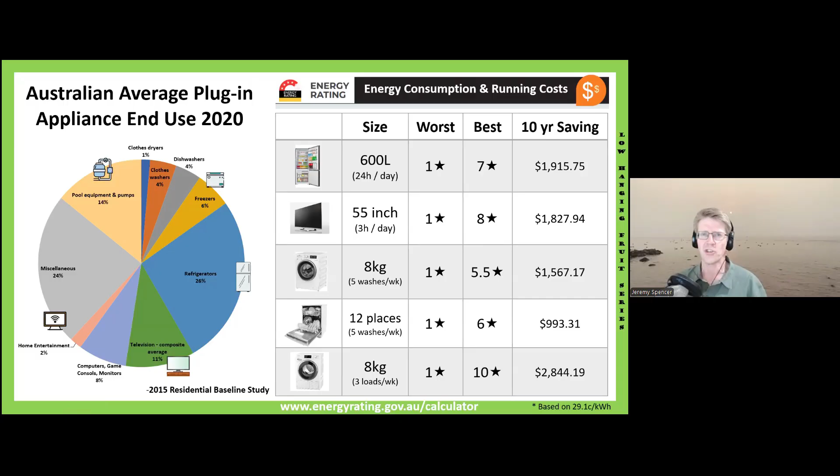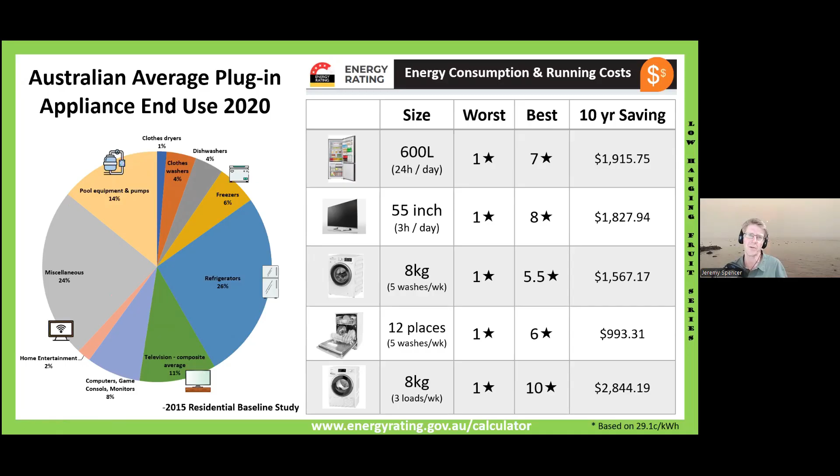There's also another template that you can download, and this is actually written to clients, just giving them some information that if they want to go and choose their own appliances, look for the higher stars. That's it. And you can fill in yourselves, if you want to, appliances of choice that are energy efficient that maybe clients have used before and said are pretty good, and you can build up an efficient list over time. They do keep changing though, so you've got to keep on top of it.

So assuming you make some effort to educate clients, maybe suggest a few efficient appliances, and tell them that the stars do make a difference, and that you've built this house and you're really trying to get this house to perform really well, you'll find that most clients will come on board and not choose terrible appliances, and you can get a bit of a bite out of that wedge as well.

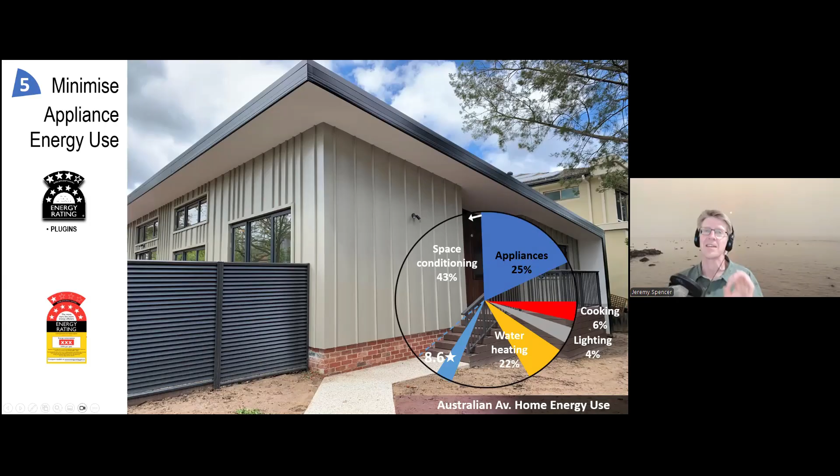So look what we've done here. We've gone around each of those wedges, done what we can, nothing that is super costly, but we've made sensible decisions just to minimize the energy needs. We haven't changed the functionality at all. The house still functions exactly the same. We've simply changed the amount of energy that the home uses.

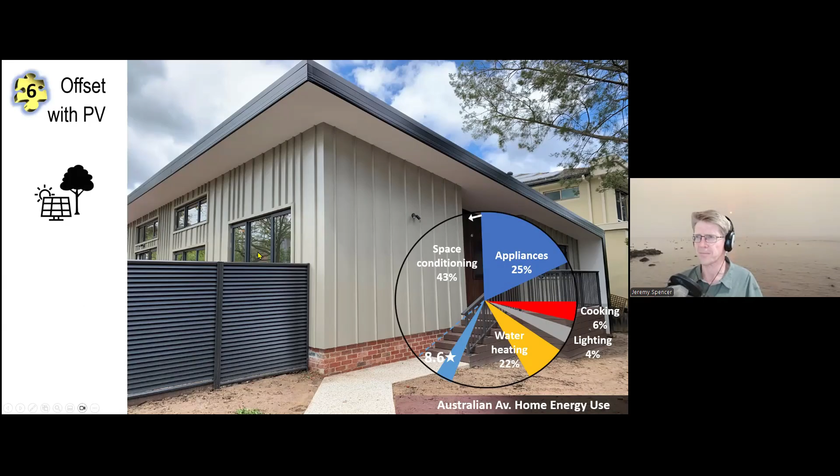All right, the last piece of the puzzle is to offset with photovoltaics. So, how much should you put on for net zero? Like I said before, the way to know is at that design concept stage to ask the thermal performance assessor that question and see what number they come up with. From our rule of thumb, the homes that we build are around about 200 square meters; these ones here were unfortunately a little bit bigger, 260 square meters or so.

But we've found that somewhere around, as you saw before, that 5 kilowatt level, homes start to break even on a yearly budget, maybe not every month. But you can check that with an assessor. Whatever number they come up with there, I would always add on at least a kilowatt to that number, just to account for real world fluctuations and different energy use within the home.

Add on a kilowatt. The other rule of thumb is if you've got an electric car and you want to charge it at home, another 2 kilowatts of panel will charge most electric cars to drive an average of 50 kilometers a day.

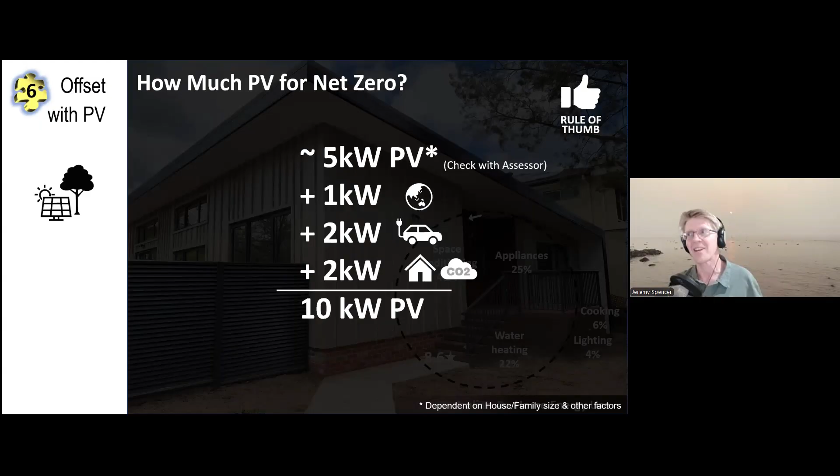So there's 2 kilowatts to add on for the car. And if you're trying, like we were for the True Zero series, the Carbon Zero series, to create a home that pays back its embodied carbon debt, another 2 kilowatts on top of that should do it. And that comes to a 10 kilowatt system. Now, a couple of years ago, that would have been a big system. Today, I'm not sure if I said it before, but yeah, I did. The average system that's sold on the market these days is a 9 kilowatt system. So not too far from the average there.

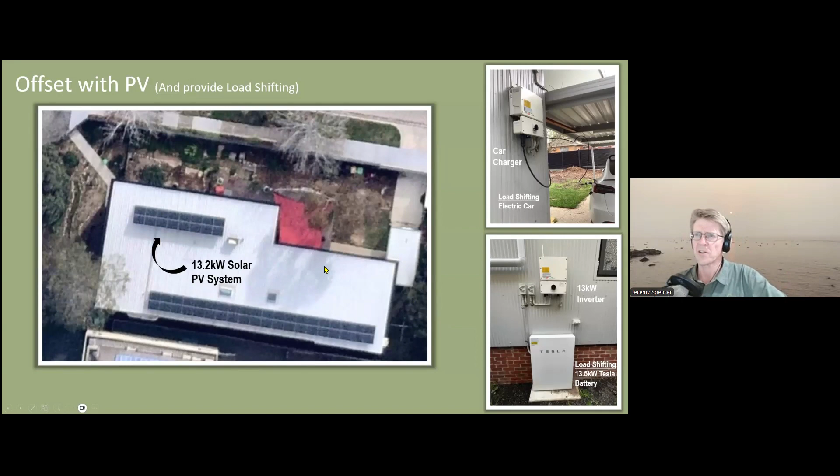In this case, the owners decided to, as owners might, upsize a little bit once they got their deals, a 13.2 kilowatt system. And we usually put an amount of money aside for a 10 kilowatt system, just as a provisional sum. And then at the time when we're up to putting it in, that's when we get some quotes. The way we do it, the owner gets the quote and we just take that money off the contract, but there's an allowance there for it. That's the way we do it. The owners chose, in this case, a 13.2 kilowatt system, a little bit of a bigger system.

The other thing that they also chose was this Tesla battery to combine with it. And like I said, along with the lower demand and operational needs of the home, combined with the battery, that's what allows this house to be so energy independent. And also the car charger acts as a way of shifting some of that power that's created during the day to be used at other times.

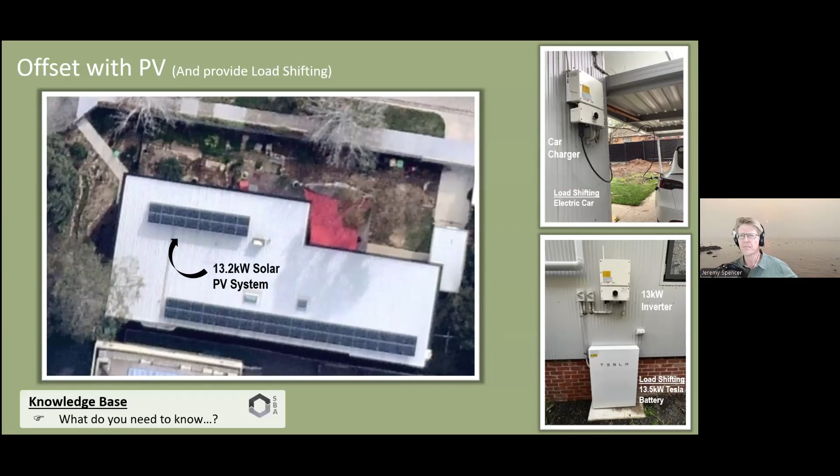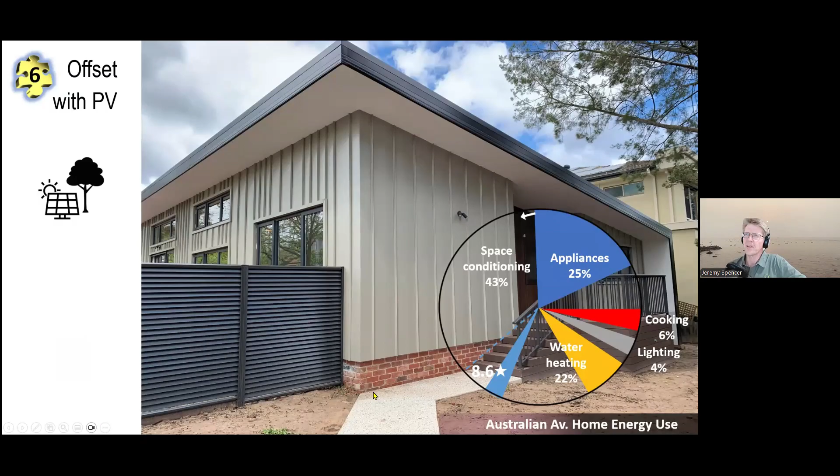And what do you need to know for your knowledge base to do this well? Well, if you go to step number 6, there is a section, PV, what you need to know, and it outlines all the different things that you need to know there. And assuming you follow those rules of thumb, you should find that the home is producing at least as much power as it needs over the year for a net zero outcome.

All right, so what have we achieved here? We've achieved a net zero home. Yes. We've also achieved a home that is a power hub. We've achieved a home that is resilient in the case of blackouts or emergencies. We've achieved a low bill lifestyle for the clients, and also from a social point of view, we've achieved low grid demand as we're adding these next 1 million homes onto the grid.

How are we doing, Ham? Should I push on? I finished all the net zero stuff. The True Zero, the embodied carbon part is not too long, maybe another half an hour. What do you reckon? Well, I have been having a chat with a few people offline here, and everyone was keen to go past 20 past 6. It is now 20 past 6, and I guess from my side, having a couple of young kids, I probably need to go and jump into parenting shortly. I wonder if you and I could jump on at some point and record that one and post it. Yep. Or let's do another one.

I mean, I think this one, given the time of the year, has been super popular, and we've had a heap of people jump on. And do you know what? Not many people have jumped off after 6 o'clock, which is great to see. So I reckon we do another one, mate. That's my gut. I think also it allows us to do embodied carbon justice because there's a little bit of background information to really know what different strategies there are to choose from and what has an effect and what doesn't. And so, yeah, let's do it another time.